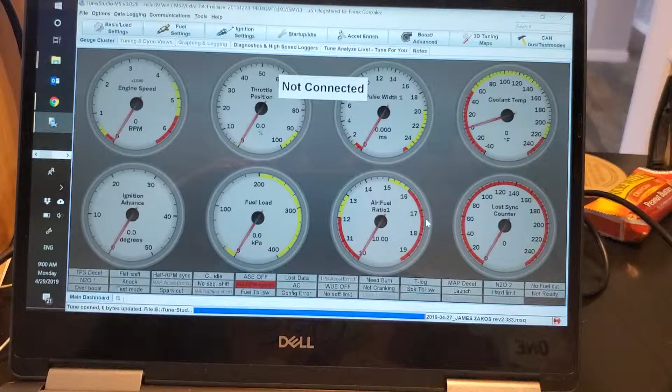Hey James, I wanted to show you a couple things here from our messages.

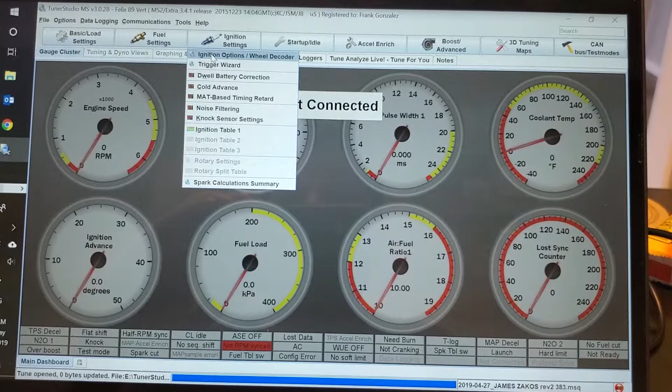As far as timing goes, go to this ignition settings and then go to ignition options. You're just going to be toggled to use table. Toggle it to fixed timing and then just plug in your 14 degrees here. Then just go to your balancer, make sure you're commanding the 14. Don't need to pull out the spout on the distributor, so don't worry about that. Just toggle this and you'll be good to go.

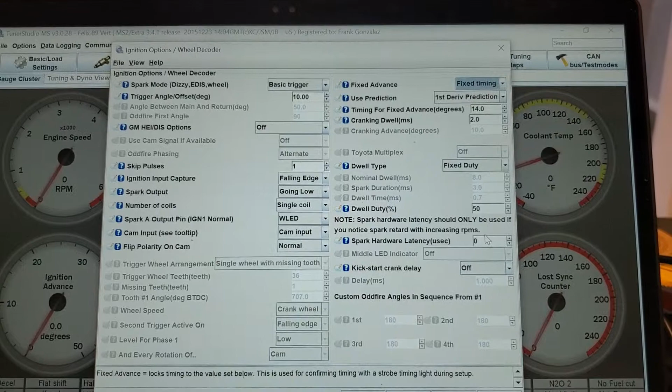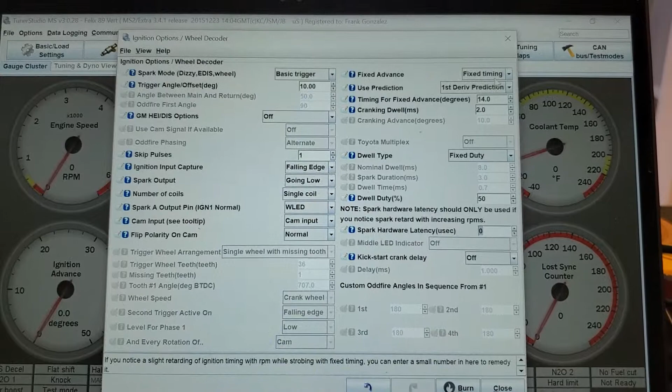Rev the engine to around 2 to 3,000 RPM and make sure it's still synchronized. If not, go to the Spark hardware latency. Start off with about 150 there if it is retarding the timing, and then just go up to a maximum of around 250. But if it's synchronized, then don't worry about it. All right, so then once you're done verifying your timing, come back here and then use table. And then just go ahead and burn and close it.

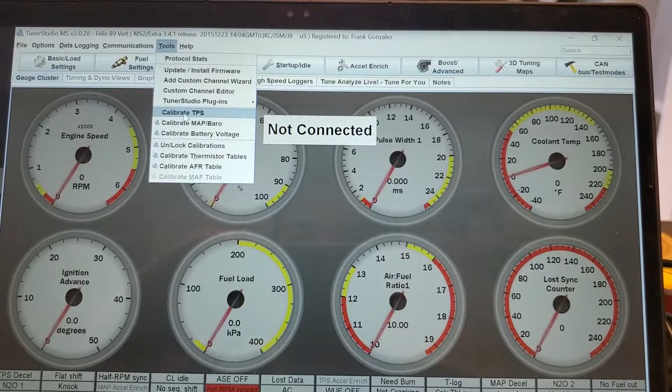All right, let's see here, what else? We talked about the TPS. You already know how to calibrate that. Go in here to your AFR and make sure that you select your AEM. Your pillar should match the gauge on here. So you've got two options there for AEM. If it still doesn't work, then we'll just need to verify voltage. But that should get you going.

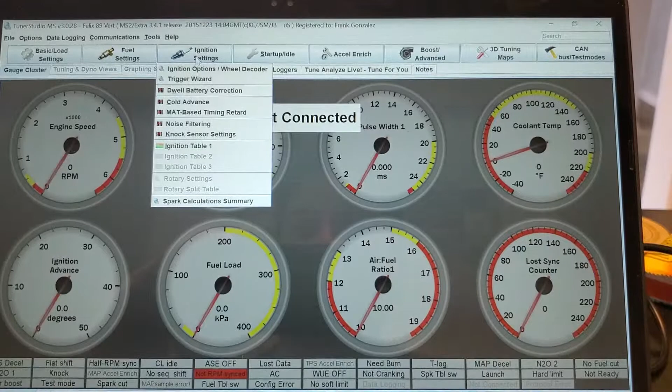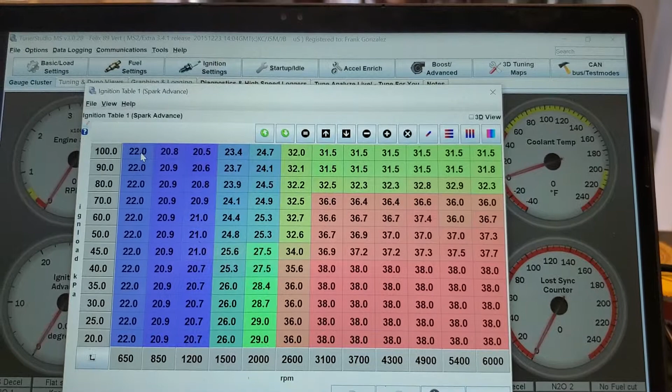The other thing that I didn't mention is that when you toggle from fixed timing to use table, fixed timing locks in whatever's here. Use table goes to this table right here. All right. So in your case, after you synchronize everything, and if it's still idling too high, I would take out about 4 degrees out of this whole area I just highlighted. Because in yours it's higher. This one is lower only because I was already making you a new tune.

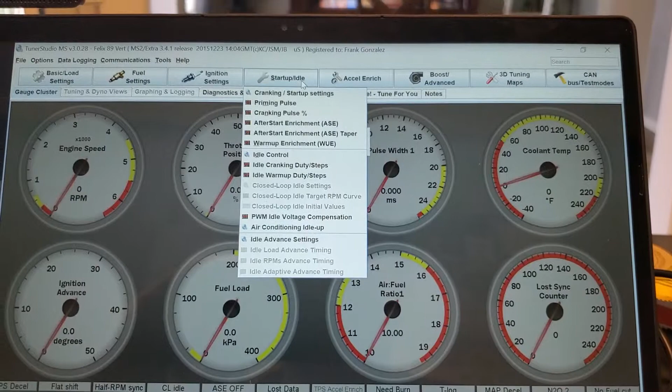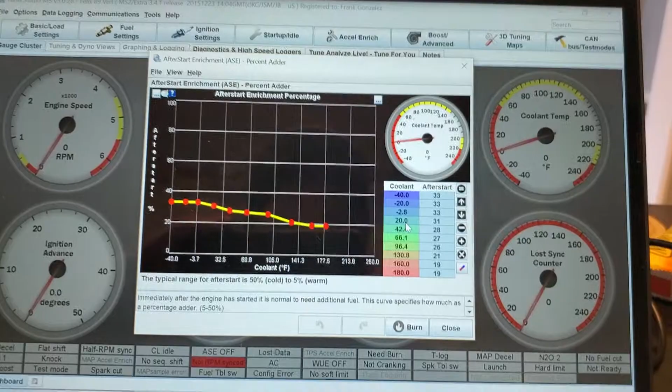Other than that, let's see, you asked me about surging. Okay, so the surging is going to be a matter of giving it some more fuel. So after the car starts, you go into this after start enrichment. So go in here. I would start off by giving it an extra 15 points here. Do this before you turn on the car. But after the car is running, if it is still surging, you're going to have a bubble here that matches the temperature of the engine.

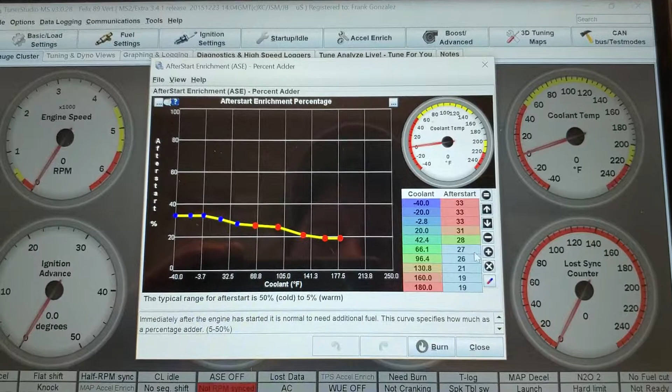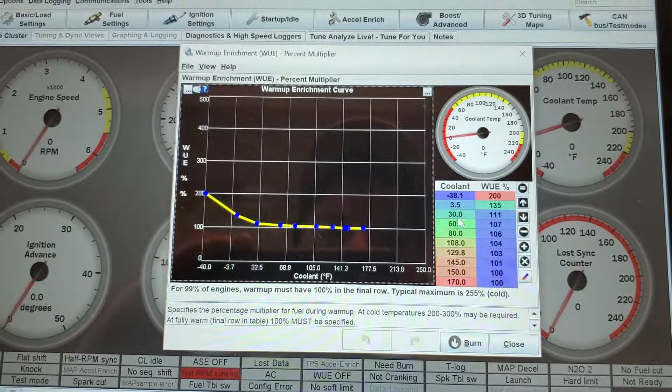Go to that area and highlight any of those cells, and then just start increasing this with the up arrow until you hear the car settle out. And you're only going to do this for the first, I would say, 20 to 30 seconds. And then after that, it goes into this warm-up enrichment table. All right, same thing here. You got coolant temperature versus how much enrichment you're giving it. So I would adjust those two tables and go with that.

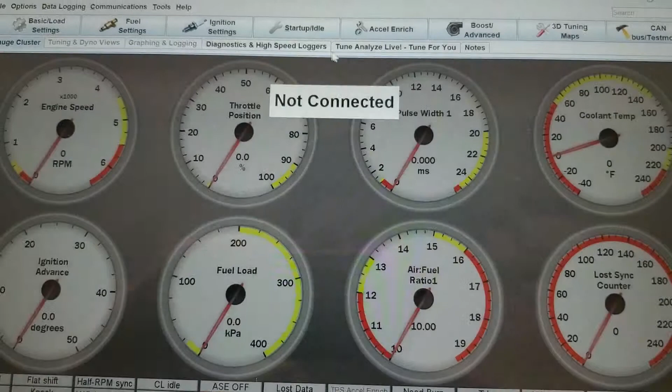One other thing that I need you to check before you start the car, key forward. With the key forward, just go to this setting right here. Startup/Idle. Go to idle control. Select this crank to run taper. Yours might say 2 seconds. Put that to 10 seconds and then hit burn. Let's see here.

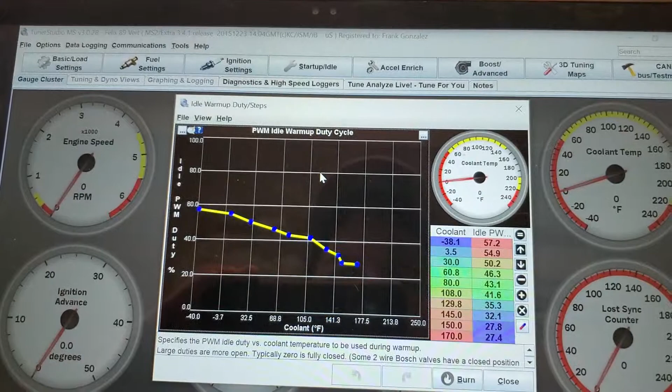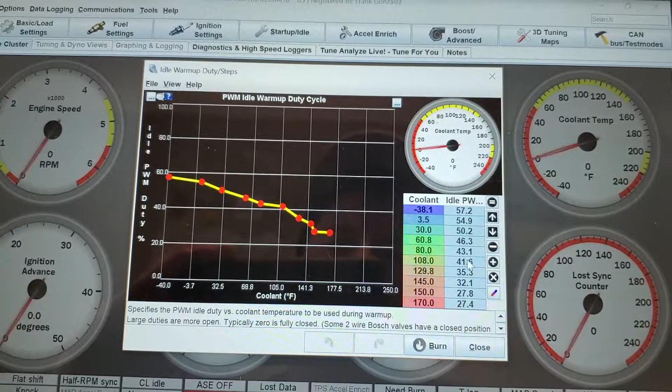Okay, this idle warm-up duty steps. This is the frequency that you're sending the IAC valve versus temperature setting. So if you see that it's idling too low or too high, you can give it more frequency here to increase the idle or lower it. Just play with it and see what your car wants.

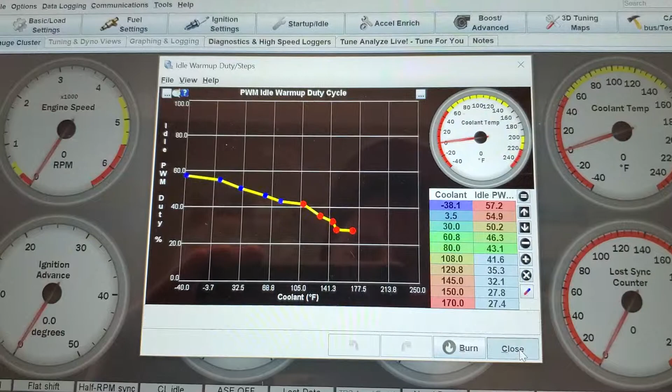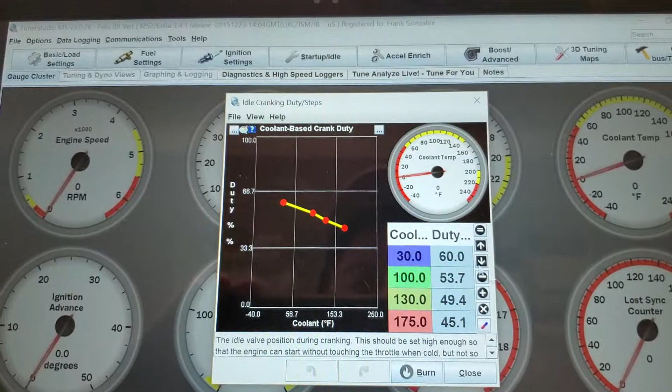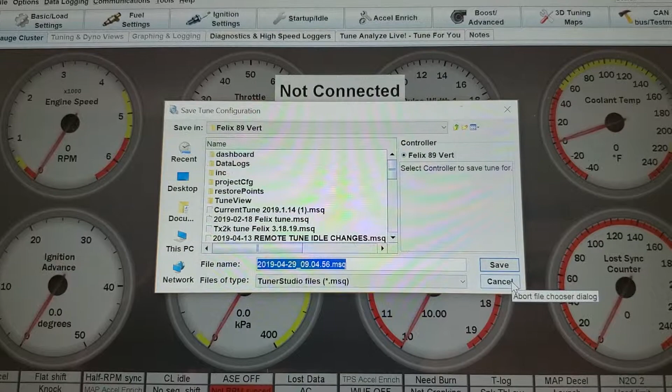So anyway, don't forget to file, save tune as, give it a unique name. It automatically puts in the year, month, and date with timestamp. That way, as you make your changes, you get to go back if you don't like something, or something goes out of whack. But anyway, I'm gonna load this up for you and send it.